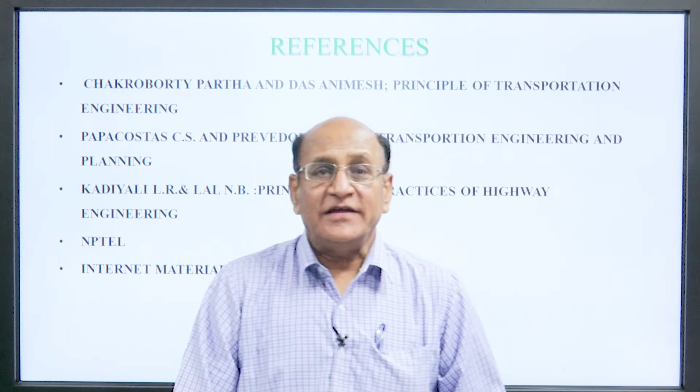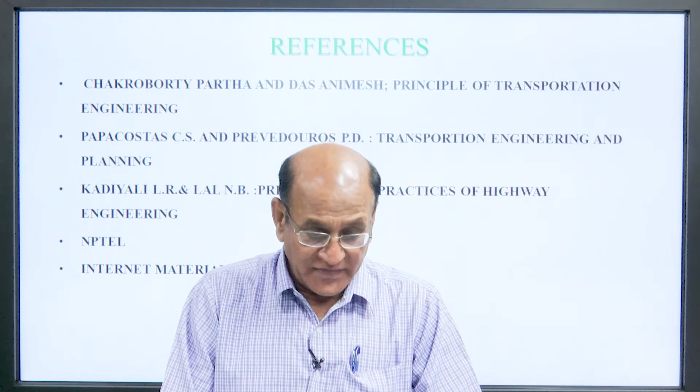The references we have taken are Chakroborty Partha and Das Animesh, Principle of Transportation Engineering; Papacostas CS and Prevedouros PD, Transportation Engineering and Planning; Kadiyali LR and Lal NB, Principle and Practices of Highway Engineering; NPTEL, and some material has been taken from the internet.

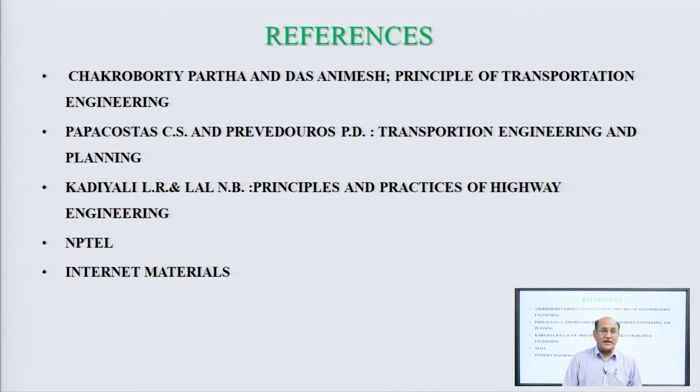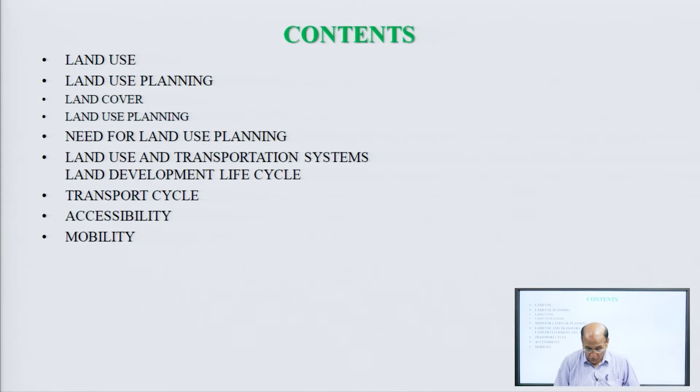As we know, whatever development occurs in urban area or even rural area, that needs land. In rural areas it is not so affected, but in urban areas, when land use is not decided in advance of 20 years, 30 years, 50 years, it will be very difficult for the urban area to plan further development.

So it is very much useful to decide which land could be used by the development authorities in advance of say 20, 30 or 50 years. Land is a thing which is not expanding at all, it is fixed, and we have to develop infrastructure for the population expansion of the city. So what do we have to do? We have to plan for land use for future development.

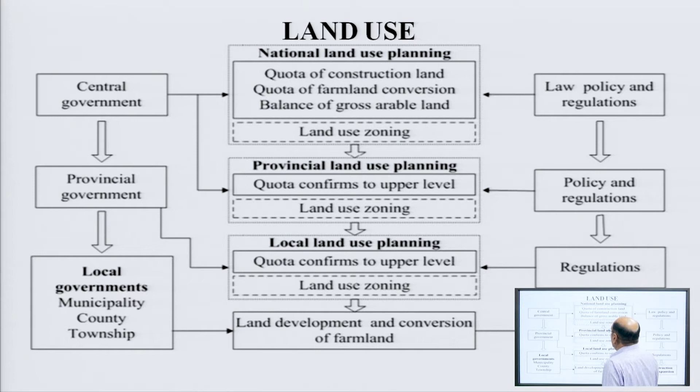So we come here, this is the national land use planning, in which central government is involved, provincial government is involved, and local government or municipality or township, nagar nigam, metro city, these are involved. And we see here...

This is the quota of construction land. Suppose an area is specified for future development, so here will be a quota for a particular type of work. So the quota of construction land, quota for farmland conversion.

It is very important, no one can convert the nature of use of the land. Only the competent authority is able to change the nature of the land. This power is vested for changing the nature of land based on area - in urban area the competent authority is LDA or something like that, or in rural area this is the district board which has power to convert the nature of land.

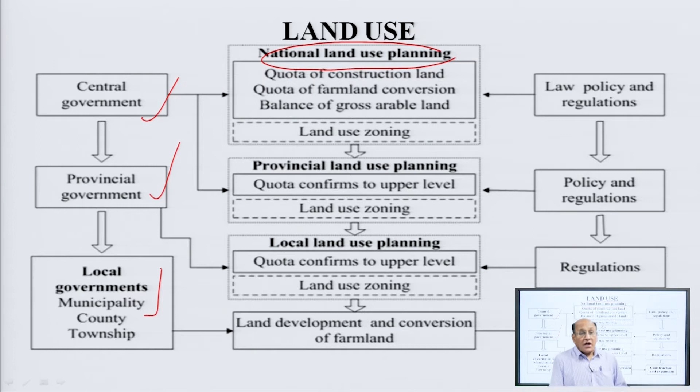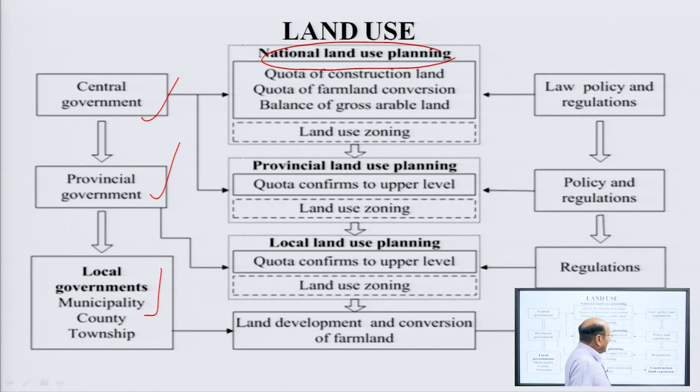Conversion of farmland into other purposes is a very difficult task which could be done only by the competent authority. So we can say this could only be implemented by law, policy and regulation. This law policy could be implemented by central government or state government policy and regulation, and the local body also has power for this. Finally, construction land expansion could be taken up. So this is land use.

Land use can be defined as a series of operations on land carried out by humans with the intention to obtain products and or benefit through using land resources. Many state governments have made a land bank for future development. Land use refers to the purpose the land serves or different activities carried out on it, such as residential, commercial, recreational, etc. It does not describe the surface cover on the ground, because surface cover is a slightly different thing. For example, recreational land use could occur in a forest, shrubland, grassland, or a manicured lawn.

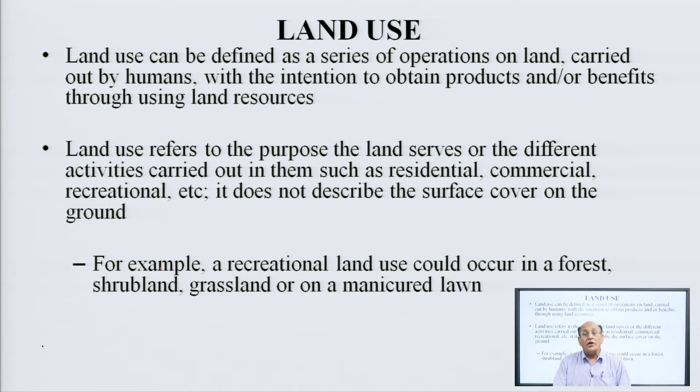Now, come to the land cover. Land cover is the things which cover the entire land in the jurisdiction. Land cover refers to the surface cover on the ground, whether vegetation, urban infrastructure, water, bare soil and others. It does not describe the use of land, and the use of land may be different from the land with same cover type. For instance, a land cover type of forest may be used for timber production, wildlife management and recreational type. So, this is land cover.

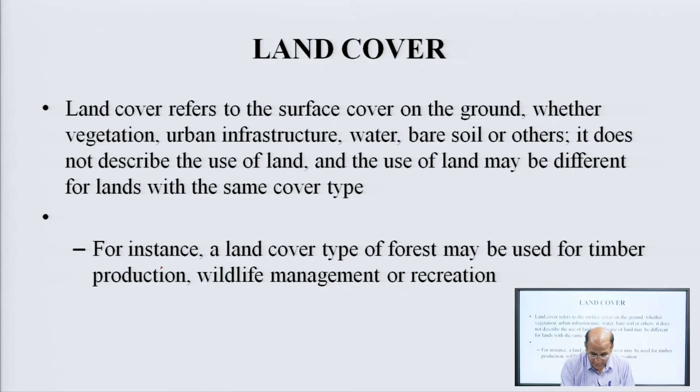In short, land use indicates how people are using the land, whereas land cover indicates the physical land type. Satellite imagery and aerial photographs can identify land cover, but inferring land use often requires more knowledge of the studied region.

Understanding both land use and land cover, and their transformation over time, is important in urban planning, since they provide a history and background of the urban growth process. This understanding helps the urban planner decide what to retain, where to plan new development and the type of development, what to connect and what to protect. So, these are the objectives of land use planning.

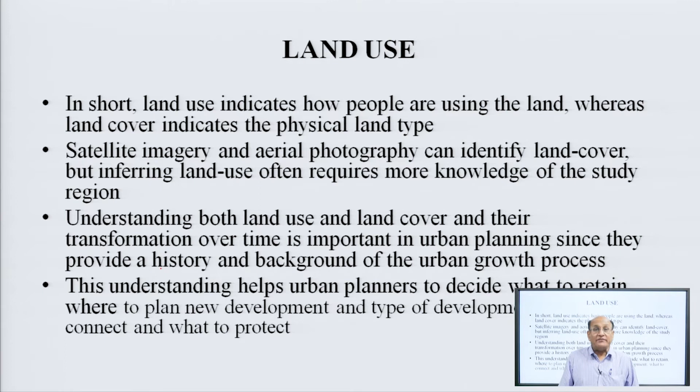Land use planning is required to predict the spatial organization of population and economic activity in the region. Land use models serve two distinct purposes: forecasting total activities of an urban area, and second, allocating these activities among a predetermined set.

Land use planning for a city is a complex task and needs to be done carefully. Changes in the land use pattern are generally irreversible, because once something is constructed on a particular piece of land, it is very difficult to change the nature of that land, as it will hazard many things and reflect on many developments. So, this must be done very carefully, because it is generally irreversible.

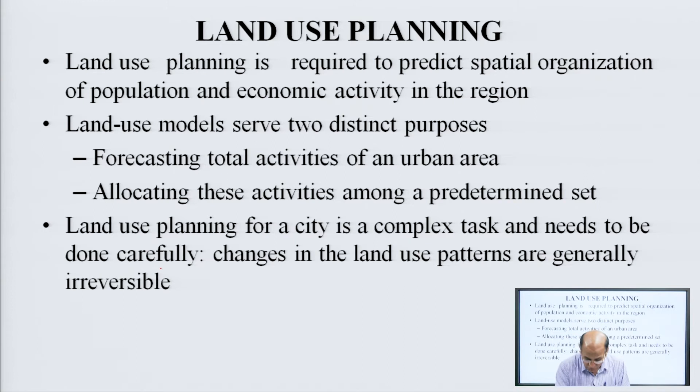Need for land use planning: we can see here, this is participatory land use planning. Then ecosystem-based land planning means considering how much forest will be required, how much water body will be required. Then regional land use planning is required, because development is based on that, and who will avail the development can be considered in regional land use. Integrated land use planning is also important, in which many factors are considered for development. Then territorial ecological planning is also required for land use. Urban land use planning is also done, and then the spatial land use planning, which we have discussed many times, will also include this.

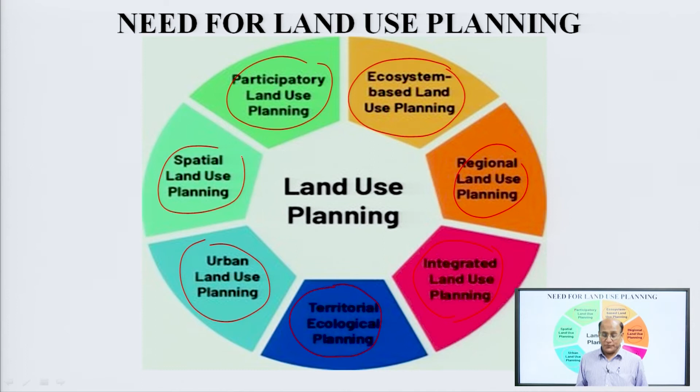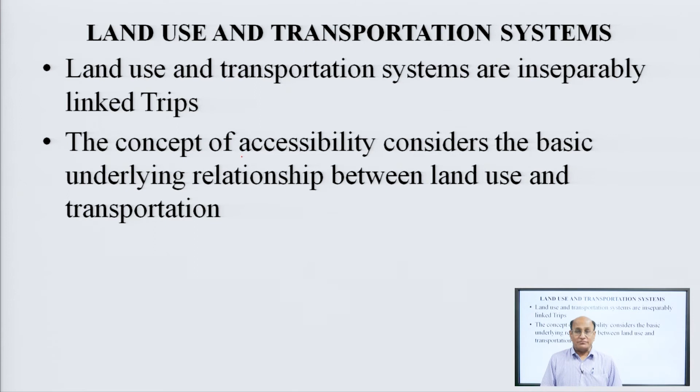Land use and the transportation system are inseparably linked. The concept of accessibility considers the basic underlying relationship between land use and transportation.

Then come to the transport cycle. Suppose there is some infrastructure, so there is a land use, suppose a road. So there is a land use for the road construction, and that infrastructure, that road, will generate a trip to connect different places of the city. This is the transport need. Then if there is a road, there is a requirement of transport facilities - it may be car ownership, may be public, may be pooled, may be metro, may be urban railway. So transport facilities should be there. Then accessibility - how you are availing the facility provided for transporting.

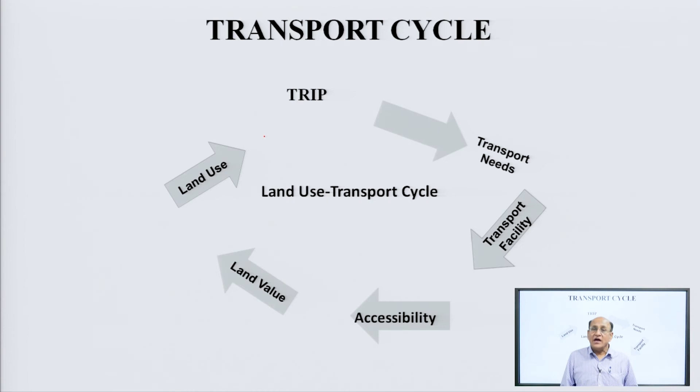So we can see here again, this is the land use, again this is the trip as far as transportation is concerned. Then this is the transportation need. Once there is a need of transportation, we have to provide transportation facilities like car, bus, metro, urban rails, etc. So we will provide transportation facilities, and then come to the accessibility - how easily one can get the transportation system. This is accessibility. Once accessibility improves, then the value of land in that particular area will automatically increase.

And again this will go for land use, and this cycle will go on a regular basis.

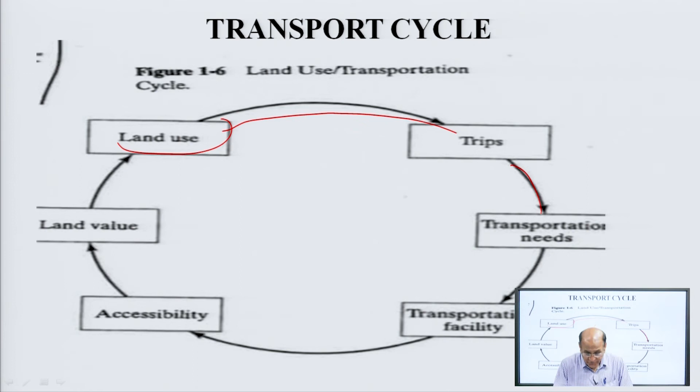Now, come to accessibility. Accessibility refers to the ease of movement between places. It indicates a spatial relationship or degree of connection between one location and all other locations in a region. Accessibility increases either in terms of time or money. Whenever you talk about the increment, it means in terms of facilities, easiness, money, time saving, etc.

So, in urban areas, the unit of distance is in the shape of money, time, rupees, comfort, etc. When the movement becomes less costly, despite this, the people of the city, the urban area, like lesser cost of transportation.

I am giving one example, metro. Metro in Lucknow. The passengers for the metro of Lucknow are not available because the cost of travelling on the metro is very high as compared to the other transport facilities available in Lucknow. So people are not willing to travel by metro. This is a big problem.

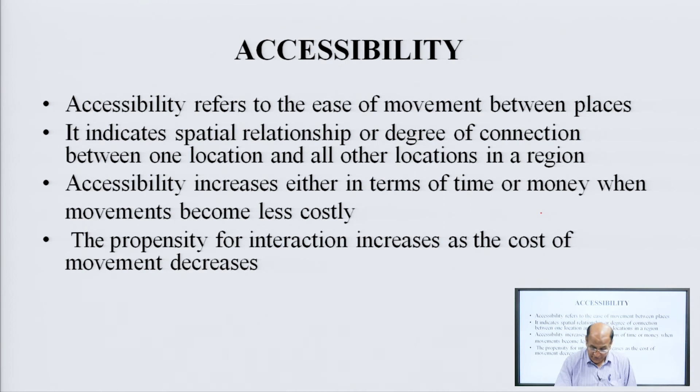Now, personal accessibility. Personal accessibility is measured by counting the number of activity sites. It is also called opportunity, because in an urban area, opportunity is also a type of attraction available at a given distance from the person's home, factoring the number by intervening distance.

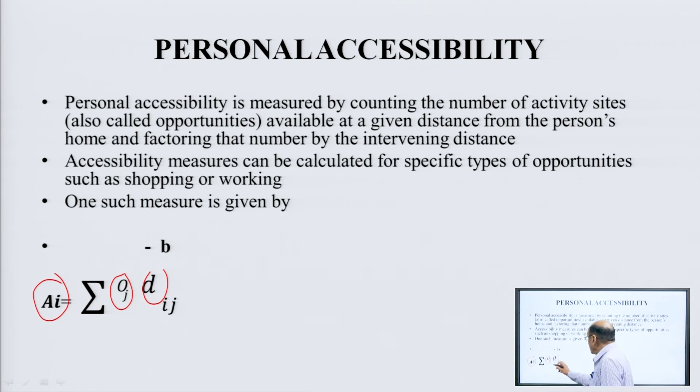Accessibility measures can be calculated for a specific type of opportunity. One such measure is given by this: AI equals the sum over j of OJ and Dij to the power minus B, summed over i and j.

So this is AI, which could be given by, where AI is the accessibility of person i, OJ is the number of opportunities at the distance from the person's home, and Dij is the some measure of separation between i and j - travel time, travel cost, or simply distance, etc. - and B is the constant.

Then personal accessibility: here accessibility of everyone living in a particular zone is aggregated, and therefore there is no way of distinguishing among different groups of people within a zone, such as those with cars and those without cars.

For example, all 1000 workers living in a zone R1 are all assumed to own a car and have to reach E1 in 9 minutes. So everybody will have to have a car.

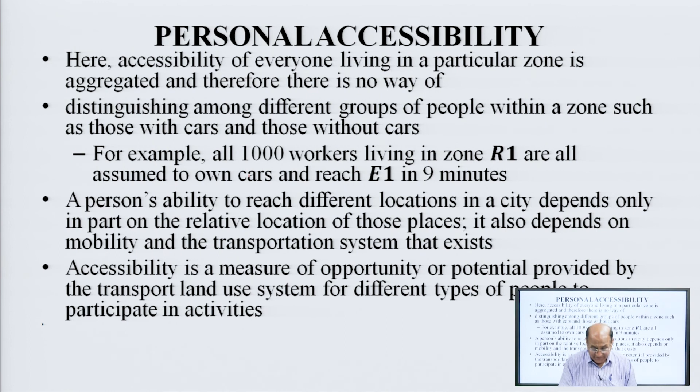Three essential components of accessibility are the geographical distribution and intensity characteristics of the existing transportation system.

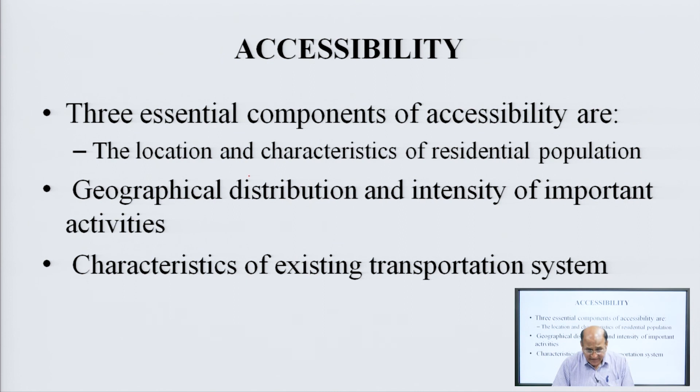So then, come to mobility. Mobility is the ability to travel from one place to another in an urban area, associated with a particular group of urban residents. It indicates the ease with which a person can move, which depends on the performance of the transportation system and the ability of individuals. It is measured in terms of trips made by all modes.

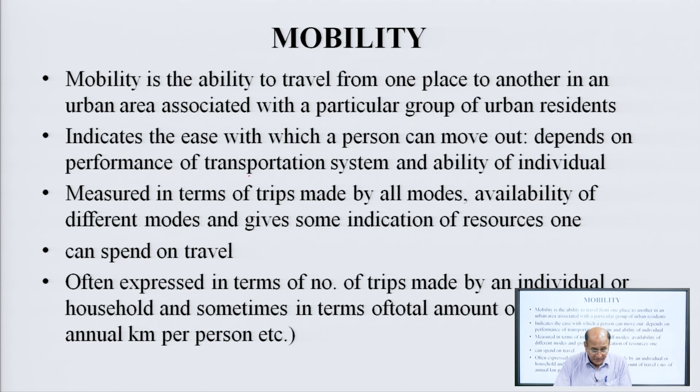This can be spent on travel, often expressed in terms of the number of trips made by an individual or household, or sometimes in terms of the total amount of travel.

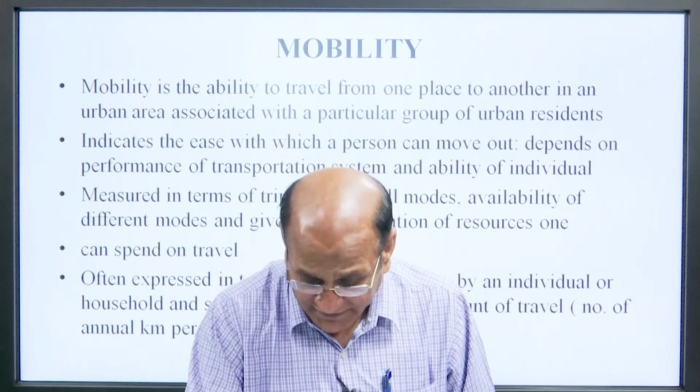Mobility has a disadvantage as a measurement per capita trip. There can be many short trips, or trips of all trip lengths will be given the same weightage. It can be affected by the distribution of the population by age group in the zone.

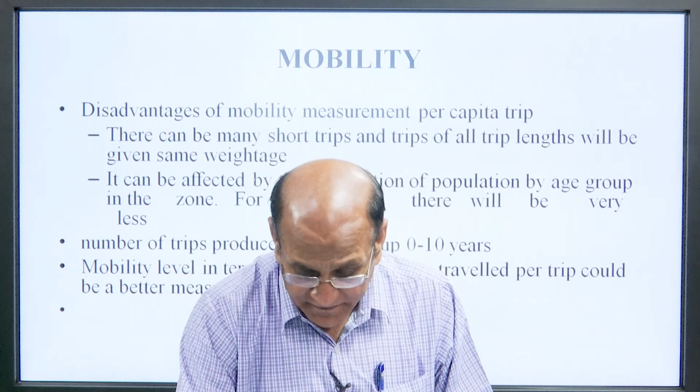For example, there will be a very small number of trips produced by the age group of 0 to 10 years. Mobility level in terms of average distance travelled per trip could be a better measure than per capita trip. So the following equation was developed for Mumbai city.

The Black's accessibility, that will be equal to 18.77 minus 1.44 into mobility.

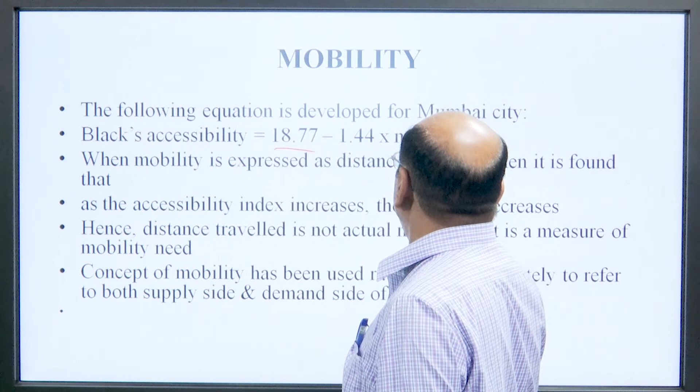When mobility is expressed as distance travelled, then it is found that as the accessibility index increases, the mobility decreases. Hence, distance travelled is not actual mobility, but is a measure of mobility needs.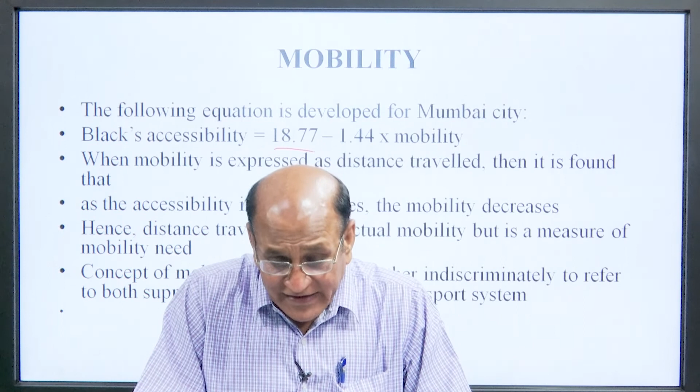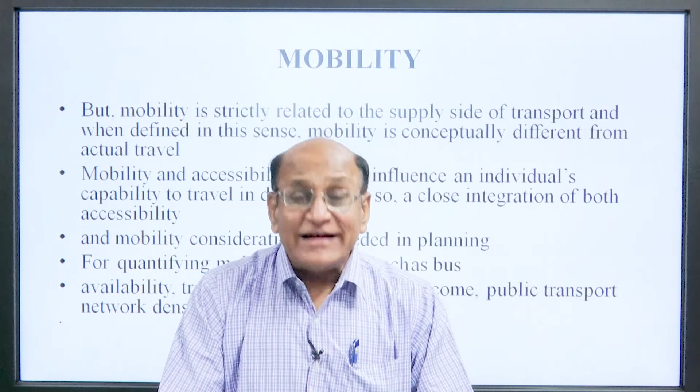The concept of mobility has been used rather indiscriminately to refer to both the supply side and demand side of the transportation system. But mobility is strictly related to the supply side of transport when defined in this sense.